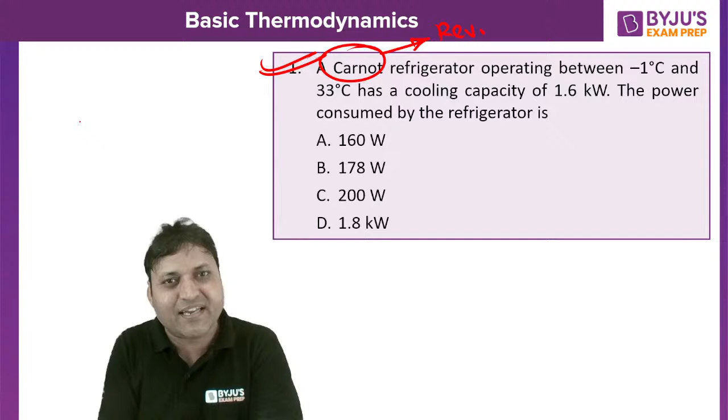There is a Carnot refrigerator. What is Carnot refrigerator? It is the reversible refrigerator operating between -1 degree Celsius and 33 degrees Celsius. T2 is equal to -1 degree Celsius. There is a refrigerator, work input is W, and this is the higher temperature, 33 degrees Celsius. It has a cooling capacity, let me call it Q2, then this is Q1. What is cooling capacity? That is the refrigeration effect of 1.6 kilowatt. Q2 is 1.6 kilowatt. The power consumed by the refrigerator is to be calculated. Can you let me know what is the power consumed by the refrigerator? So W is to be calculated.

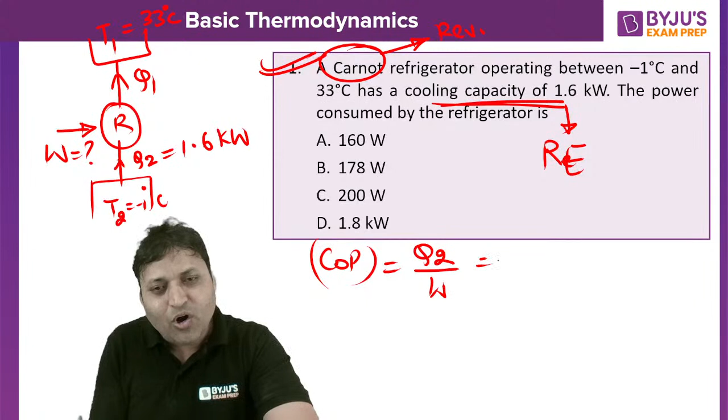Because it is a reversible refrigerator, COP is desired effect upon work input. So that is Q2 by W, and because it is a reversible refrigerator, we can write it in terms of temperatures T1 and T2.

We can equate this. This is the expression for COP for reversible as well as irreversible cycle, but this expression is completely applicable to reversible cycle: T2 upon T1 minus T2. What is the answer? Pawan is saying B, Sai is saying C. What is the correct one?

Q2 is 1.6, and the question is to find out the power consumed. So we can say W is equal to Q2 into T1 minus T2 upon T2. Put the value, you will get the answer. Q2 is 1.6 kilowatt, and T1 minus T2 is equal to 34. Isn't it 34?

34. The difference is because the T2 temperature is negative, -1 degree Celsius. So 33 minus -1 is 34, divided by T2. T2 must be in Kelvin.

The temperature has to be absolute temperature. As long as we are talking about the temperature difference, you can either calculate in degree Celsius or Kelvin, it will give you the same result. But when we are writing T2, then it must be 273 minus 1. That is where people commit mistake. So whenever writing the temperature difference, it is 34, whether you find the difference in Kelvin or Celsius.

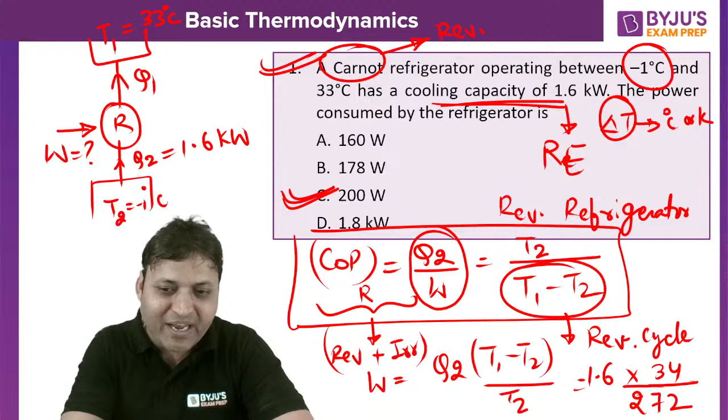The next question, number 2, on your screen. Very simple, very easy, but these types of questions are also important from your competitive examination point of view.

On a TS diagram, the slope of constant volume line - if I draw a TS diagram, this is entropy on x-axis, temperature on y-axis. This is how the diagrams will be drawn, like this.

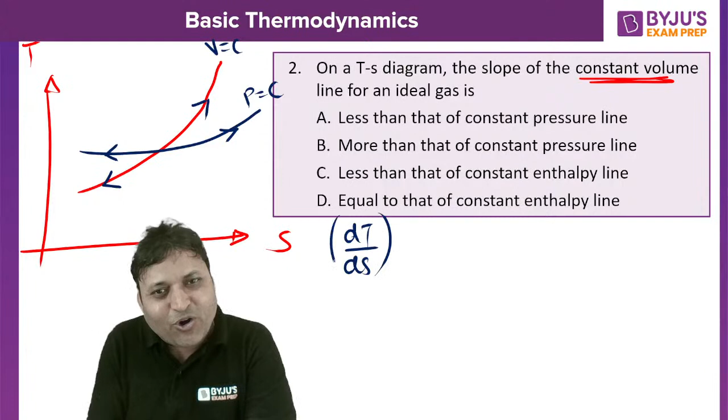So constant volume will be having more slope, constant pressure will be having less slope. So dT by dS for constant volume is T by Cv, and dT by dS for constant pressure is T by Cp. Because Cp is greater than Cv, or Cp by Cv is equal to gamma, which is greater than 1, we can say slope of constant volume is equal to gamma times slope of constant pressure process. So gamma is greater than 1.

So constant volume lines will have more slope than constant pressure line. Anjali, it is not A, it is option B. Constant volume will have more slope compared to constant pressure. This is how we can write the slope on TS diagram.

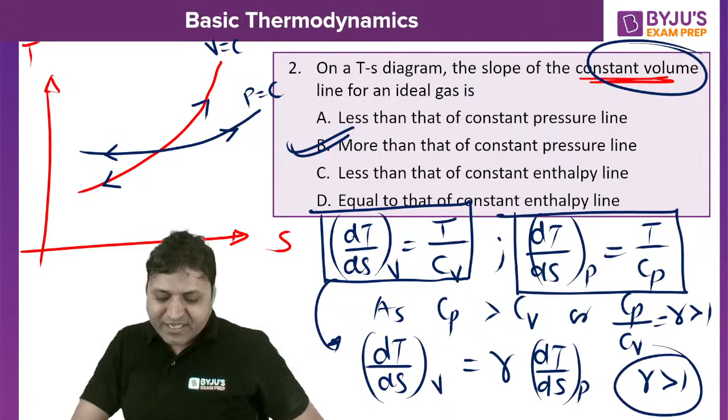Can you just let me know, isothermal and adiabatic, which will be having more slope? Is it isothermal or adiabatic process on PV curve? On PV curve, if I ask you, which is having more slope, isothermal or adiabatic?

On the PV curve, dp by dv for isothermal is equal to minus p by v, and dp by dv for adiabatic process, slope is negative, equal to gamma times minus p by v. So the adiabatic process will have more slope than the isothermal process on the PV curve.

But on the TS diagram, the slope of the constant volume process will be more than the constant pressure process. Let us move to the next one.

How to draw isothermal and adiabatic process on the PV curve? Let me show you, they will be like this.

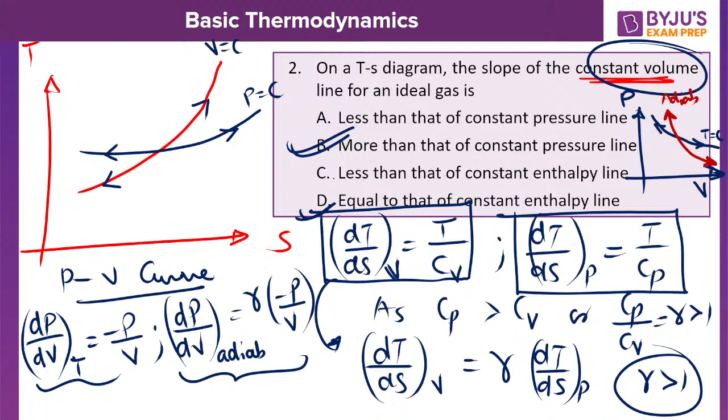This is adiabatic, and the other one is isothermal, on the PV curve. So you must know the relation between the slope of these curves on the PV diagram as well as the TS diagram.

The next one. Yes, Rowan, very nice. Please try the next one then.

Atmospheric air whose specific gas constant is 287 joule per kg Kelvin, gamma is 1.4. At 1 bar, pressure P1 is 1 bar and temperature T1 is 25 degrees Celsius, is compressed adiabatically to 2 bar. P2 is equal to 2 bar and temperature T2 is 105 degrees Celsius. Which one of the following statements is correct? Is the process possible or impossible, and if it is possible, will it be reversible or irreversible?

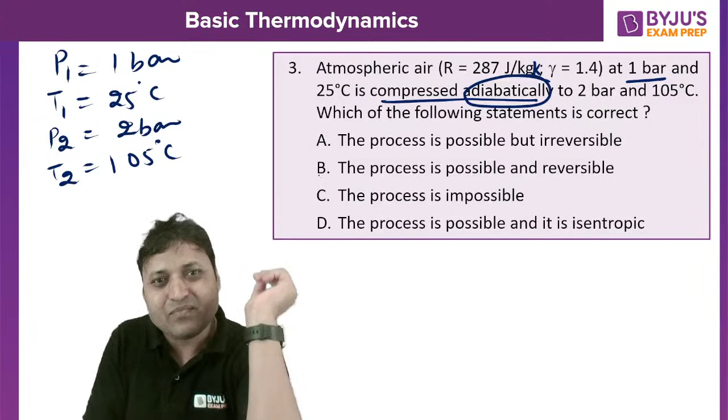Don't you think that option B and option D are the same?

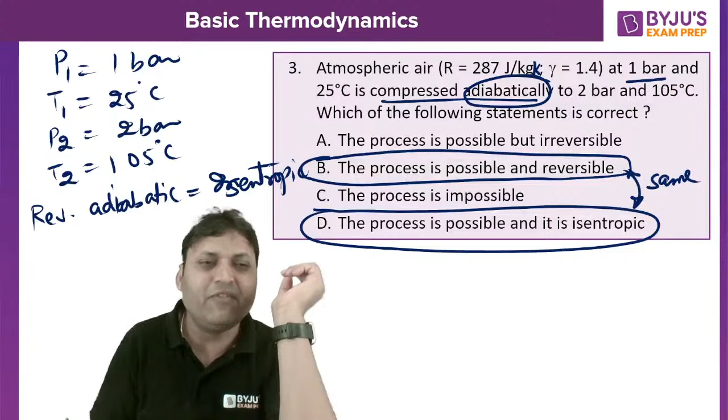When the process is possible and reversible, reversible adiabatic process is always isentropic. But is it reversible adiabatic or irreversible adiabatic? It is only adiabatic given, meaning Q is equal to 0. Will it be reversible adiabatic or irreversible adiabatic? I am waiting for your response.

So from the Tds equation, TdS is equal to dH minus VdP. Do you remember this expression? Or we can say ds is equal to dH by T minus V by T into dP, and PV is equal to RT, where V is the specific volume. Since it can be treated as an ideal gas, dH can be written as Cp dT. So ds is equal to Cp dT by T minus V by T, which is R by P, into dP.

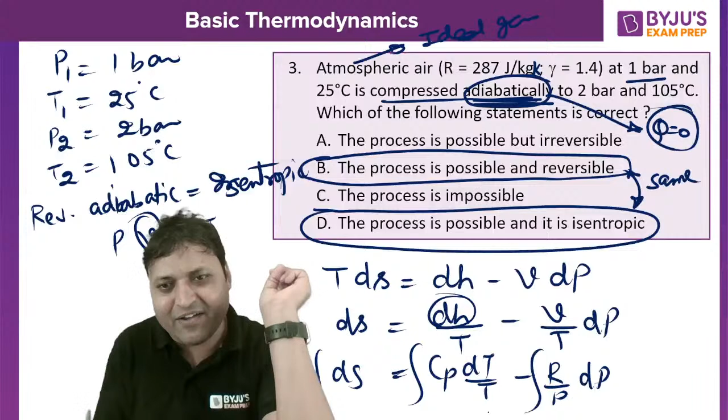And if we integrate, then we will get delta S is equal to Cp ln of T2 by T1 minus R ln of P2 by P1. That will give you the change in entropy of the system.

What is Cp? It is atmospheric air, gamma is given, R is given. R is 287, gamma is 1.4, so Cp will be equal to 1005. Don't forget to convert the temperatures into Kelvin by adding 273. So delta S is equal to 1005 ln of (105 plus 273) upon (25 plus 273) minus R, 287, ln of final pressure upon initial pressure, that is 2 upon 1.

What is the value of delta S for the system? What is the change in entropy for the system? Are you getting 40 joule per kg Kelvin change in specific entropy?

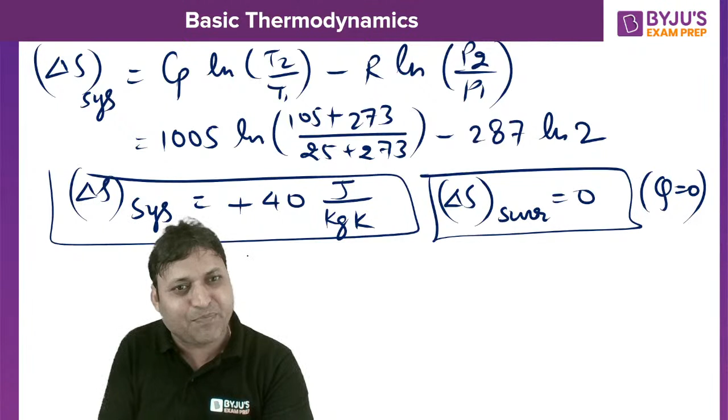And what is the change in entropy for the surroundings? That is equal to 0 because there is no heat loss to the surroundings, since Q is equal to 0. So the entropy change for the surrounding is equal to 0, and entropy change for the system is plus 40. So the change in entropy for the universe will be the change in entropy for the system plus the change in entropy for the surrounding, and that will decide whether the process is reversible or irreversible.

If the change in entropy for the universe is greater than 0, then the process is irreversible. If the change in entropy is equal to 0, then it is a reversible process, and if it is less than 0, then it is impossible. The process is not possible for which the change in entropy for the universe is less than 0. So entropy of the universe never decreases, this is called the principle of increase of entropy of the universe.

That is called the principle of increase in entropy of the universe. Because it is greater than 0, the process is irreversible and possible. Option A is the right answer.

Option A is the correct answer, isn't it? Don't think that because it is adiabatic, it is isentropic. Adiabatic is not isentropic. Only reversible adiabatic is isentropic. Reversible adiabatic is isentropic - don't think that just because an adiabatic process is given, we can call it isentropic.

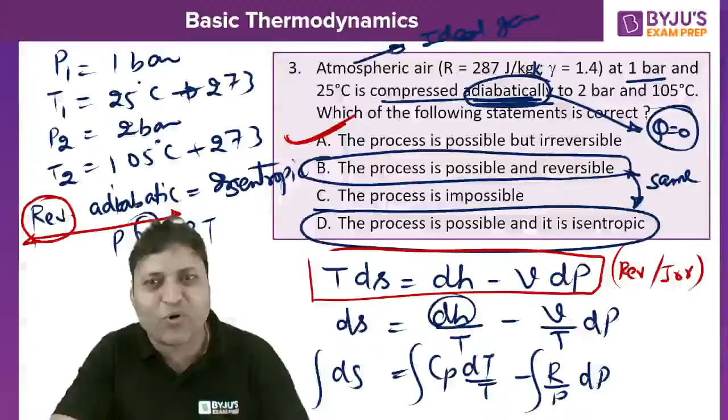I hope it is clear to everyone. This expression is valid for reversible as well as irreversible process. We do not know whether the process is reversible or irreversible. We can find out the change in entropy for the system, change in entropy for the surrounding, and then calculate the change in entropy for the universe, and decide whether the process will be possible or impossible.

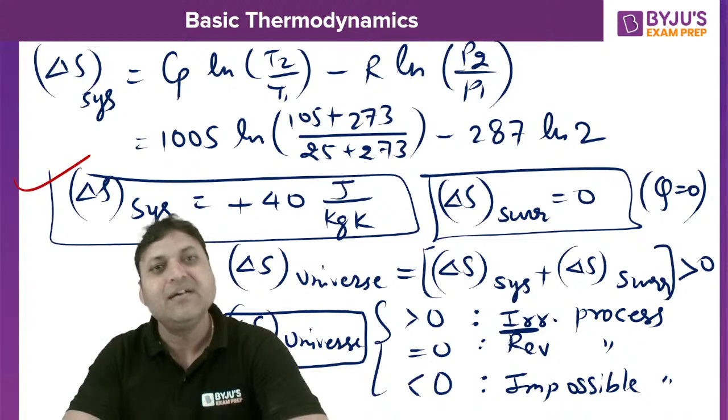Next one, question number 4. Is this clear to everyone? Please make some noise.

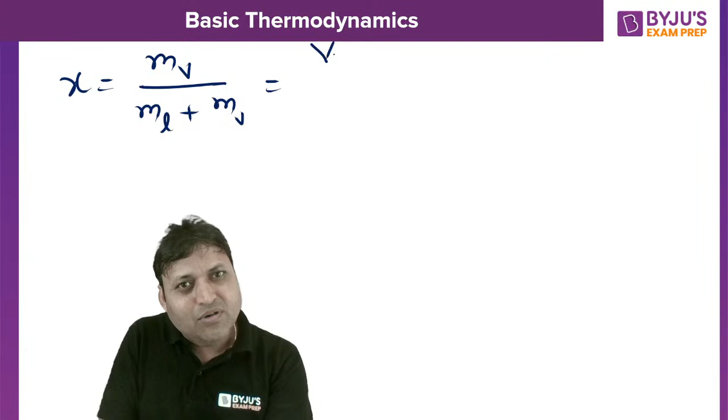Can we say mass of vapor is equal to volume of vapor upon Vg? And what is mass of liquid? That is volume of liquid upon VL, plus mass of vapor which is volume of vapor upon Vv, or specific volume of vapor.

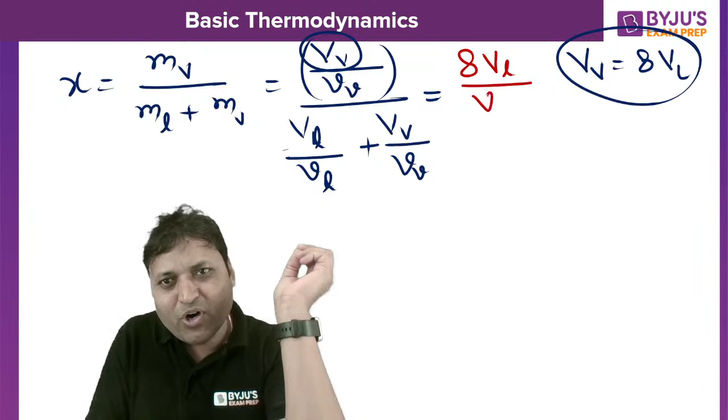Now volume of vapor is 8 times the volume of liquid, that is also given. So if we put volume of vapor as 8 times volume of liquid, we get 8VL upon VV upon VL upon VL plus 8VL upon VV. If you take VL common, it gets cancelled out. So the dryness fraction is given by 8 by VV, upon 1 by VL plus 8 by VV.

These are specific volume of vapor, and this is called specific volume of liquid - specific volume of vapor and specific volume of liquid. Can you let me know the answer? Can you solve it? The specific volumes are already given, put the values - this is for liquid and this is for vapor. What is the answer?

If you put the values: 8 divided by 1.6729, upon 1 upon 0.001044 plus 8 by 1.6729. That will give you the answer.

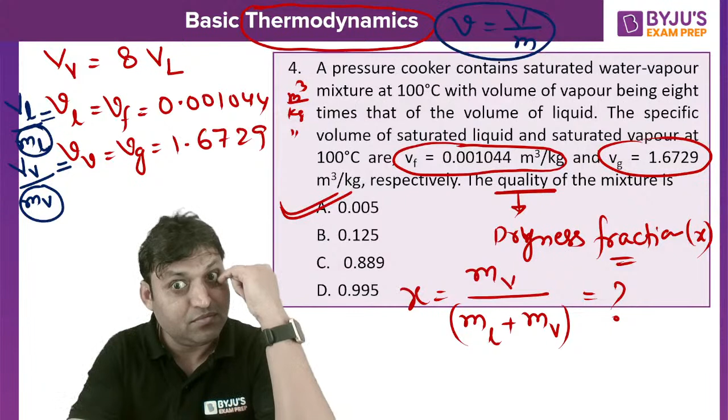Anurag, are you getting option D? The D you are getting - isn't it option A? Yes, Manas. Good, good, good.

Is this clear to everyone? The dryness fraction is the ratio of mass of vapor to the total mass of the mixture, that is sum of mass of liquid and mass of vapor. And we can write this expression in terms of specific volume of liquid and specific volume of vapor, because specific volume is volume per unit mass.

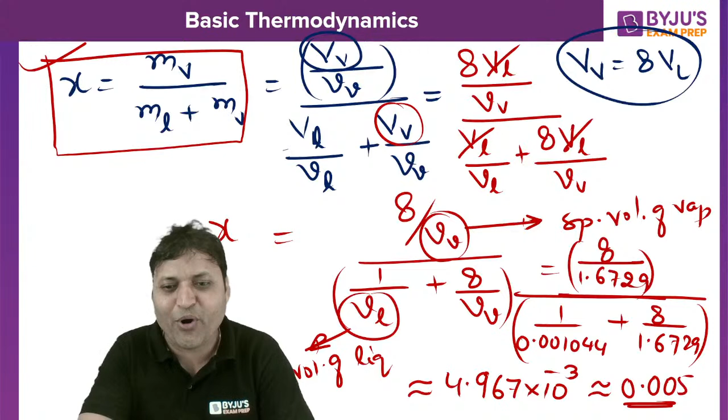Right? Time. Are you getting 4.96? 0.005. Option A is the right answer.

Next one. Next question.

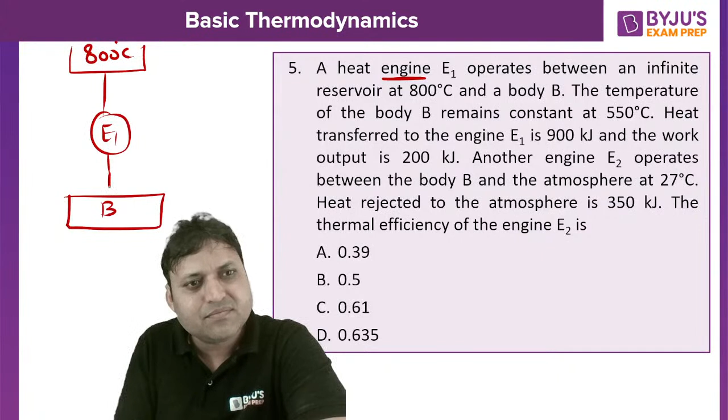There is a heat engine, a work producing cyclic device. E1 operates between an infinite reservoir at 800 degrees Celsius and a body B. The temperature of body B remains constant at 550 degrees Celsius.

Read the question and draw the diagram. Heat transfer to the engine E1 is 900 kilojoule, so Q1 is equal to 900 kilojoule, and the work output W1 is equal to 200 kilojoule.

Another engine E2 operates between the body B and the atmosphere at 27 degrees Celsius. They are not reversible engines - it is not mentioned that they are reversible. Heat engine.

Now, because the temperature of body B remains constant at 550 degrees Celsius, what does that mean? Whatever heat is added to body B is equal to the heat removed from body B. Q2 will be the same, because the temperature TB is equal to constant.

Heat rejected to the atmosphere is 350 kilojoule. The thermal efficiency of engine 2 is - what is the value? What is the thermal efficiency of engine 2?

This is how the diagram will be drawn. What is the thermal efficiency of engine 2? The work output by engine 2 upon heat input to engine 2, that will give you the answer - W2 by Q2.

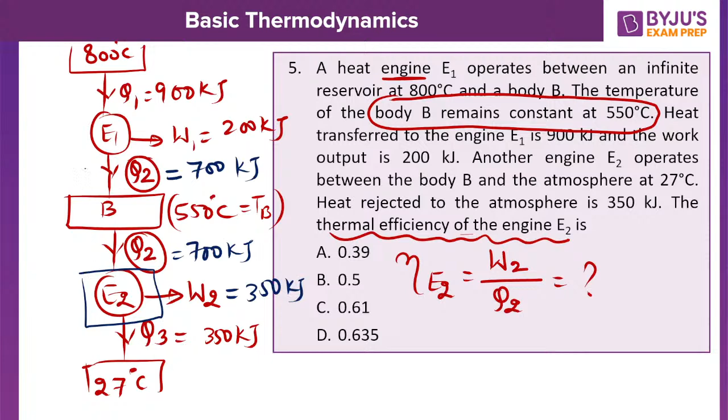This follows from the first law of thermodynamics applied to cyclic devices: net heat transfer is equal to net work transfer for a thermodynamic cycle. So W2 will be equal to 350 and Q2 will be equal to 700, giving 0.5.

Right? Fifth question, answer to the fifth question is B. Yes, Anurag. Well done.

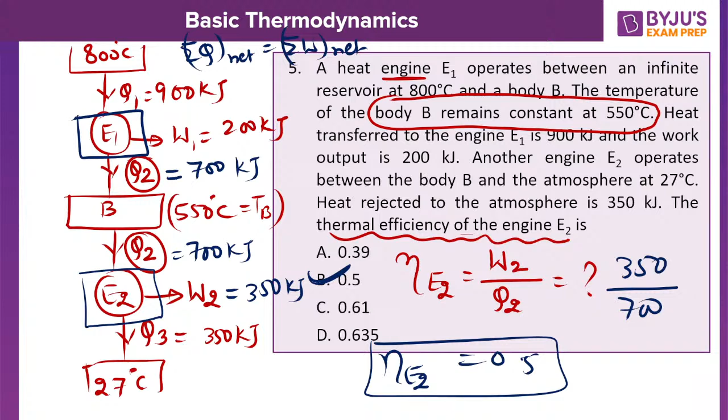Shall we proceed further to the next one? Question number 6 on your screen. Already, I want everyone to solve it.

An engine, again there is an engine - a work producing cyclic device, clockwise cycle. It reversibly receives 1200 joule of heat at 900 Kelvin. The Q1 is 1200.

After rejecting heat to the ambient at 300 Kelvin, it develops 600 joule of work. The irreversibility is equal to - is it option D?

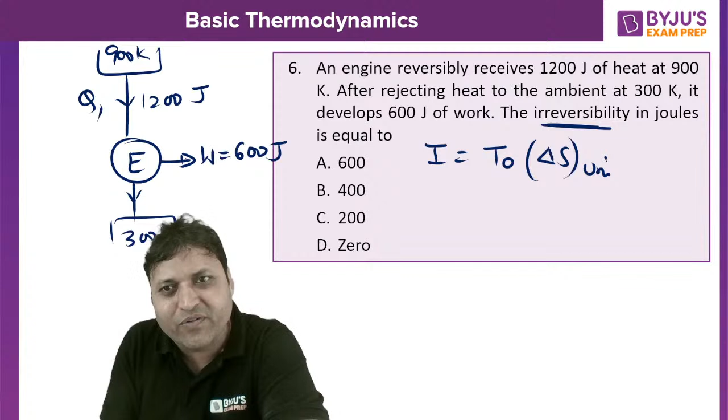Irreversibility. Can you find out the irreversibility? What is irreversibility? Irreversibility is T naught into delta S for the universe, or entropy generation - T naught into delta S of universe.

Can you find out the irreversibility? So we can treat this system as an isolated system. The system is isolated - only work is produced by the system, so the work does not carry entropy. That is why it is an isolated system.

So how to calculate the change in entropy? For the change in entropy, we can say irreversibility is T naught into delta S1 plus delta S2 - that is reservoir 1 and reservoir 2. There is no change in entropy for the working fluid. T naught is 300 Kelvin, the ambient temperature.

There is a decrease in entropy for reservoir 1 source because heat is rejected, so we can say minus Q1 by T1, plus there is heat added to reservoir 2, so plus Q2 by T2, where T2 is equal to T naught. That will give you the answer, irreversibility.

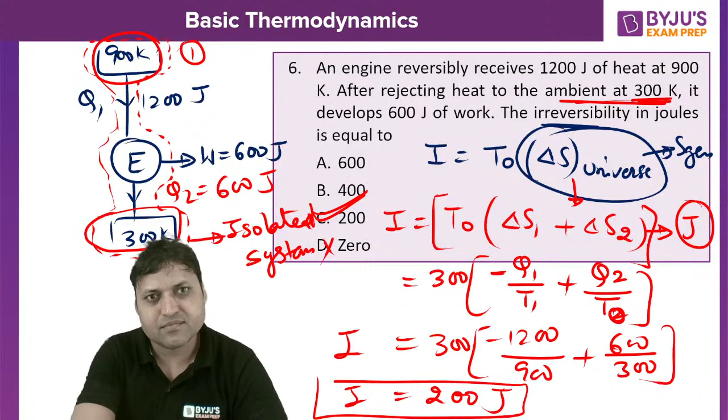Then there is a common data question for question number 7 and 8.

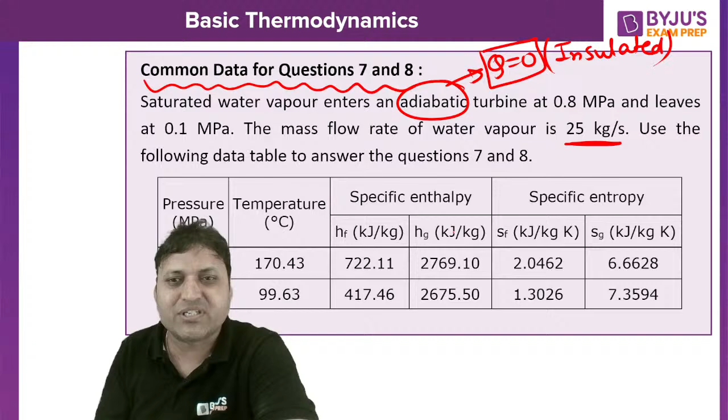Use the following data table to answer question 7 and question 8. Shall I show you question number 7? Quality of steam at the exit of the turbine after isentropic expansion is what? What is the value of X when expansion is isentropic?

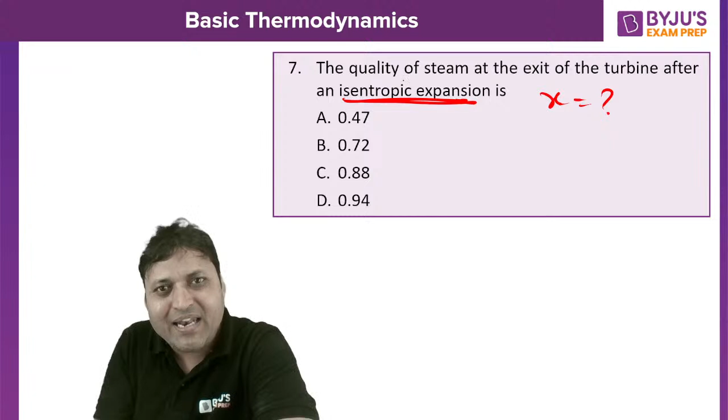If I draw the TS diagram, it is saturated water vapor entering into the turbine, so the curve will be like this. This is point 1, and it is like this, isentropic, to point 2. What is the value of X2? These are constant pressure lines. This is 0.8 megapascal and this is 0.1 megapascal.

Can you find out the dryness fraction using this table? Can you find out the quality of steam? Can you solve it?

S1 is equal to S2 because the process is isentropic. What is S1? S1 will be equal to Sg, so S1 is Sg in kilojoule per kg Kelvin.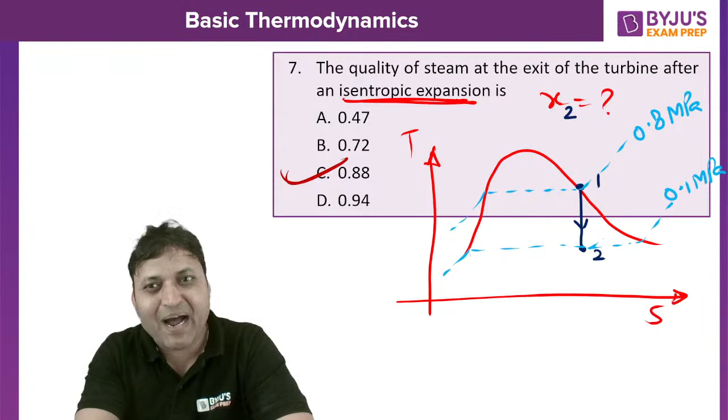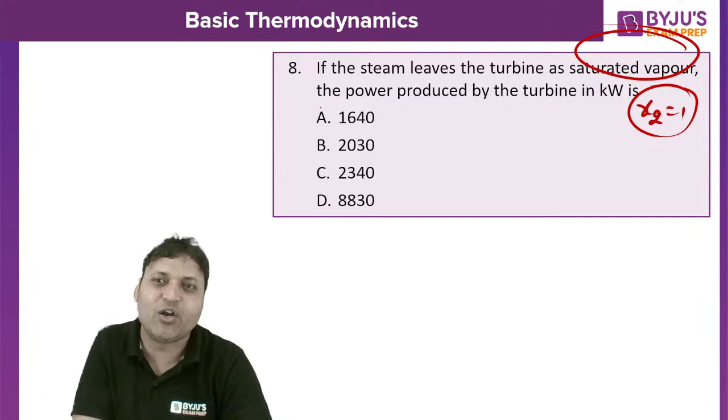That is the first part, and the second part of the question is: if the steam leaves the turbine as saturated vapor, it means x2 is equal to 1. What will be the power produced by the turbine in kilowatt? X1 is also 1, x2 is also equal to 1. Then what will be the power produced? Can you find out the power produced by the turbine?

Question number 8. The power produced will be equal to, because there is no heat transfer, from the steady flow energy equation we can say Q is equal to W plus delta H. There is no change in potential energy, no change in kinetic energy, so Q is equal to 0. So we can say W is equal to H1 minus H2. That is how the power produced can be calculated.

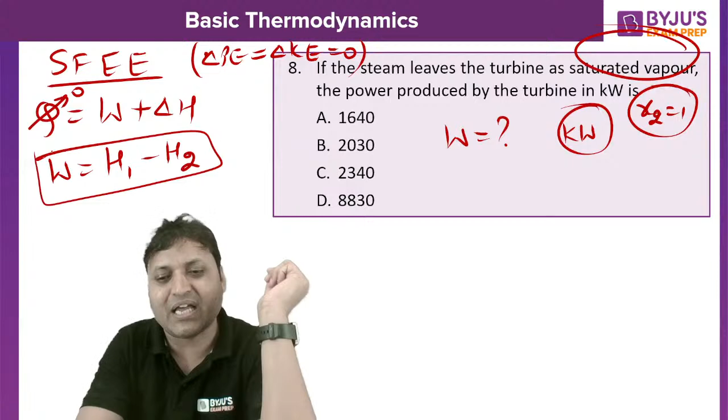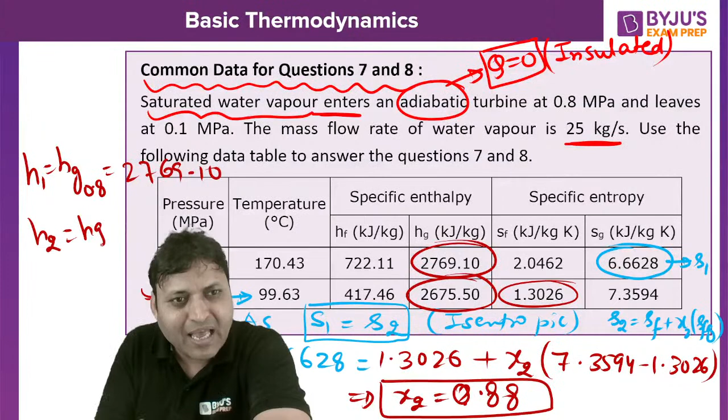What is H1? H1 will be equal to Hg at 0.8 megapascal, that is 2769.10. What is H2? Because it is leaving the turbine as saturated vapor only, H2 will be equal to Hg at 0.1, that is 2675.5. So subtraction of these two will give the answer, in kilojoule per kg.

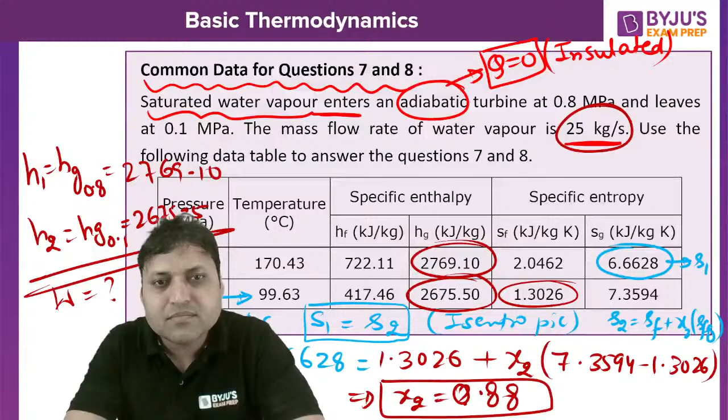We need to find out in mass flow rate is also given, so we need to find the answer in kilowatt. W dot is equal to mass flow rate into H1 minus H2, in kilowatt. We need to multiply with the mass flow rate as well. So it is 2769.1 minus 2675.5, that will give you the answer. What is the answer? For the second part, are you getting option C again?

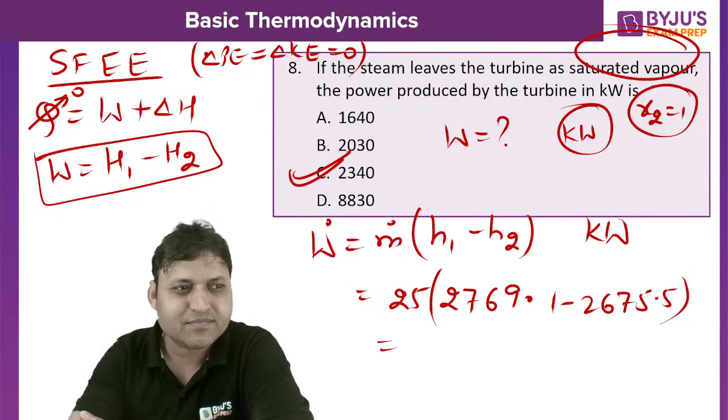7th and 8th both will have option C as the correct answer. Question number 9, next one. Everyone please let me know the answer through the comment section.

A heat pump which operates in a cycle extracts heat energy Q2 from the cold reservoir, and supplies the same amount of energy Q2 to the hot reservoir. This is T1, this is T2. So we can say work is equal to 0. From the first law of thermodynamics, whatever energy is entering is equal to energy leaving, so work will be equal to 0. Which one of the following statements holds for this process?

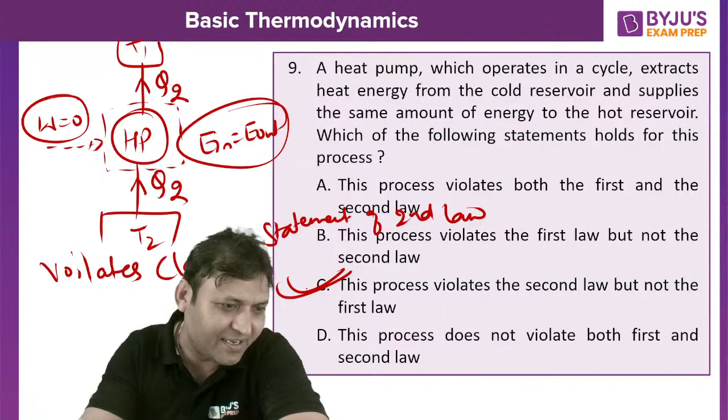There is helium in one part. Specific heat, gas constant is given, Cp and Cv are also given, while the remaining half is empty. There is vacuum in the remaining half.

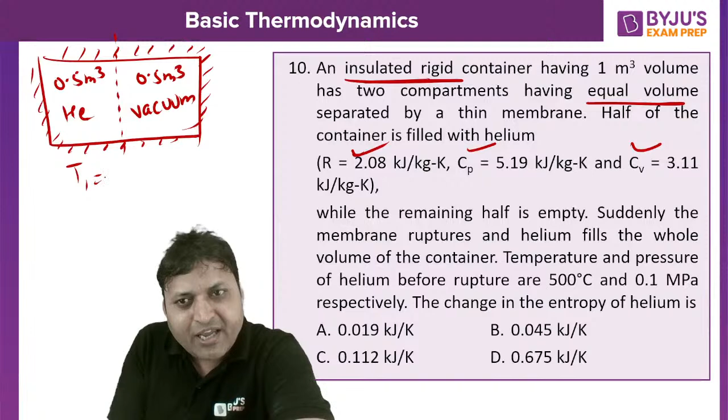Suddenly the membrane ruptures and helium fills the whole volume of the container. Temperature and pressure of helium before rupture are T1 equal to 500 degrees Celsius and P1 equal to 0.1 megapascal. The change in entropy of the helium is to be found, so it is free expansion.

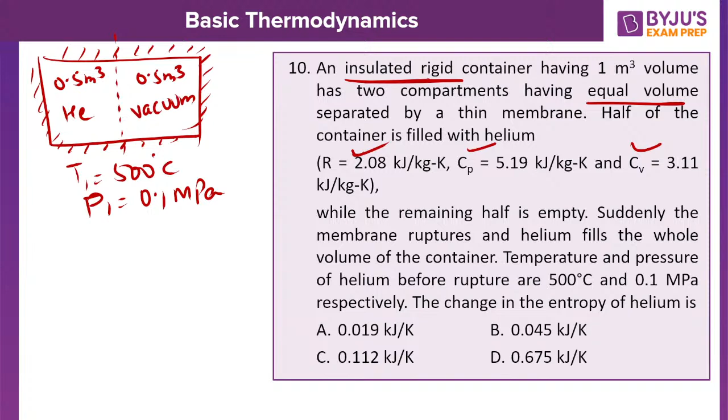Isn't it free expansion? It is a case of free expansion. What is the answer? Question number 10. Have you solved it? So it is free expansion.

And for free expansion, U1 is equal to U2 by the first law. When it is free expansion, Q is equal to W plus delta U. Q is equal to 0 because it's insulated. W is equal to 0 because it's rigid. So delta U is equal to 0, meaning U1 is equal to U2.

And if it is an ideal gas, so T1 is equal to T2, because for an ideal gas, U is a function of temperature only.

So if we write TdS equal to dU plus PdV, that will give you the value of change in entropy. Since dU becomes 0, we can say dS is equal to P by T into dV.

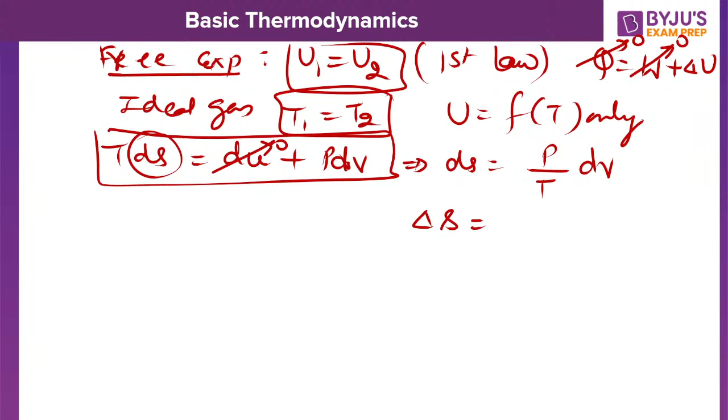Or we can say change in entropy is equal to... the question asks to find the change in entropy in kilojoule per Kelvin. We need to have the mass flow rate also. Delta S is equal to...

PV is equal to MRT, so we can say P by T is equal to MR by V. The unit will be joule per Kelvin.

This is capital S. Or we can say delta S for the system will be equal to M into R into ln of final volume by initial volume. And M into R can be written as P1V1 upon T1, into ln of final volume by initial volume. That is the change in entropy for the system.

It is free expansion, which is irreversible. Free expansion is irreversible. So this will give you the answer. Can you put the values and solve it? P1V1 upon T1 into ln of Vf by V initial.

So change in entropy will be equal to 0.1 into 10 to the power 3, because I want it in kilojoule. P1 into V1, the initial volume 0.5, upon T1. T1 is 500 degrees Celsius, so it is 500 plus 273, into ln of the final volume, which is 1, upon 0.5. That will give you the answer, the change in entropy of helium.

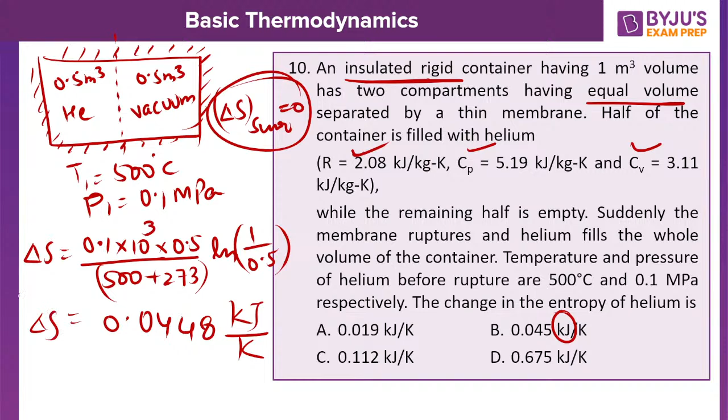Free expansion is irreversible. What is the answer you are getting? Question number 10, are you getting option B, 0.0448 kilojoule per Kelvin? The unit conversion is very, very important.

Where to multiply with mass flow rate? If I talk about specific entropy, that is joule per kg Kelvin. But if I write total entropy, that is joule per Kelvin, which is mass into specific entropy.

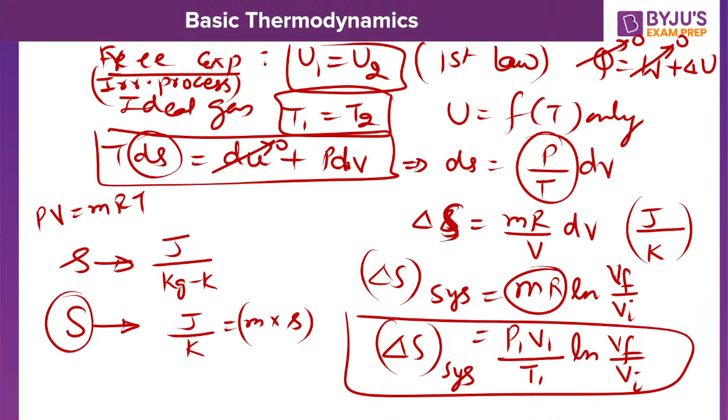The next one. The next question.

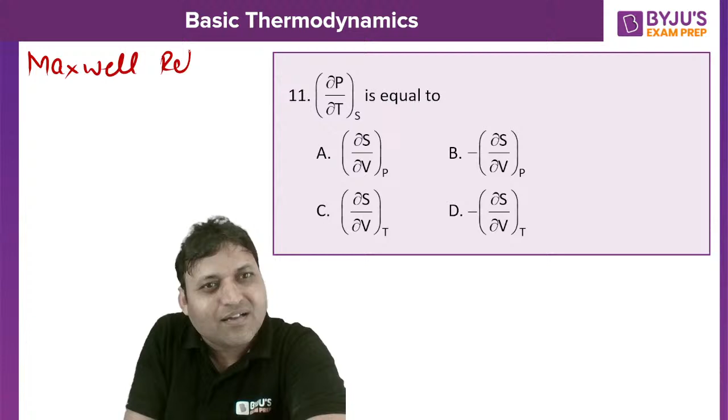Do you remember Maxwell relations? Do you remember the Maxwell relation 4 equations? Theoretical questions can be framed from that portion.

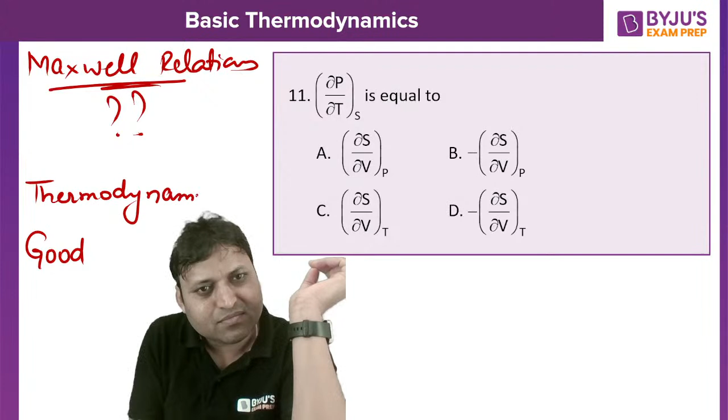What is the answer to question number 11? Do you know? You can memorize the Maxwell relationship by using this short trick, or by using the thermodynamic square. Are you having an idea about the thermodynamic square? Good.

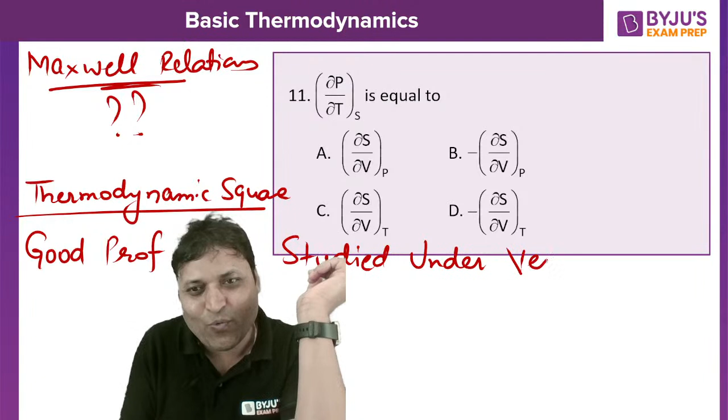Forgot the shortcut to remember. Generally people make a shortcut to remember, but yes, there is a possibility you might forget the shortcut even. Good professors have studied under very fine teachers.

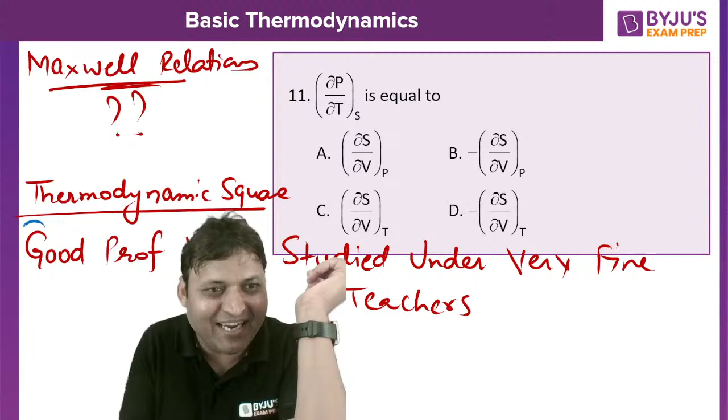Good professors have studied under very fine teachers. If you remember this statement, then you can develop the Maxwell relationship. Note: if S and P are coming together, put a negative sign.

So let me check your memory. What is the correct answer to question number 11? If S and P are coming together, put negative sign.

Now draw the thermodynamic square. This is the thermodynamic square, let us say. Start from here: Good professors have studied under very fine teachers.

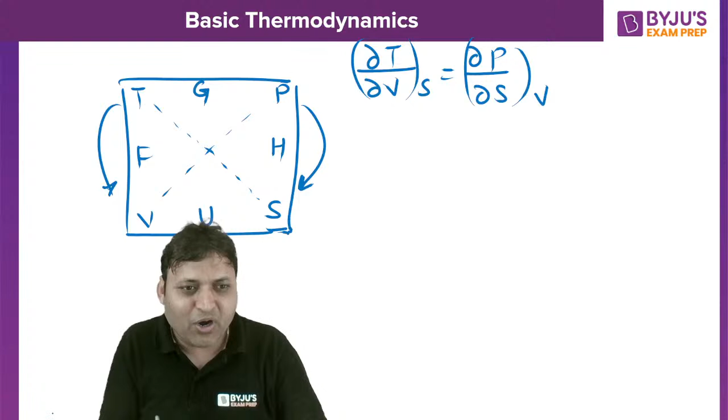First write this: del T by del V at constant entropy is equal to del P by del S at constant volume. Because there is S and P coming together, there is a negative sign. Then write this.

This is one equation. Then we can say del V by del T at constant pressure is equal to del S by del P at constant temperature. Again there is S and P coming together, so there is a negative sign here also.

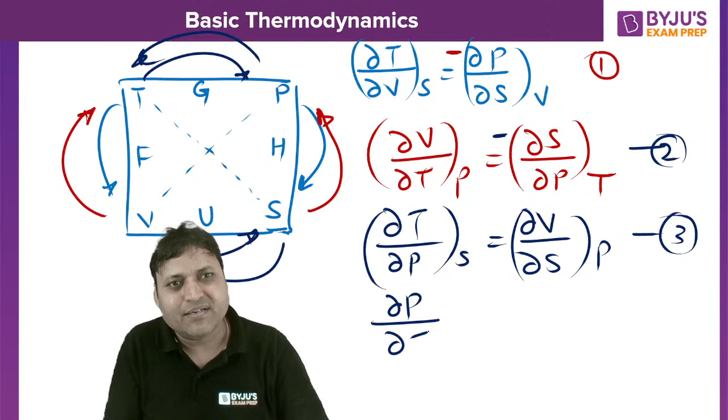This is 2. Then you can write del T by del P at constant entropy is equal to del V by del S at constant pressure. This is 3. And the fourth one: del P by del T at constant volume is equal to del S by del V at constant temperature. This is 4.

So which is it? It is del P by del T at constant entropy, or del T by del P at constant entropy? It is from this - del P by del T.

So from here what we can write: del P by del T at constant entropy is equal to del S by del V at constant pressure, isn't it? Isn't it option A?

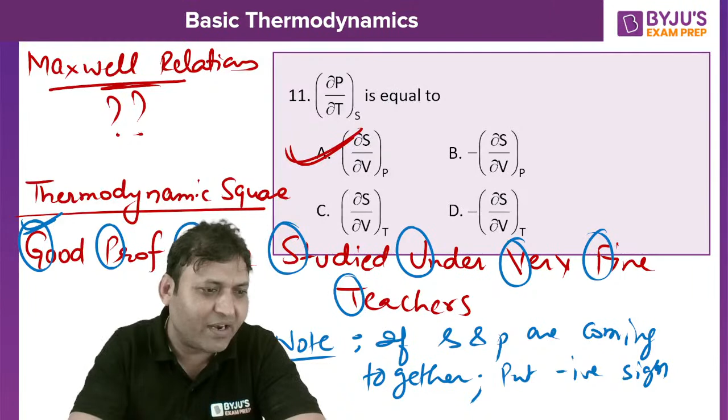Option A is the correct one. Are you getting it? So that is the shortcut to memorize the Maxwell equations. There is a high possibility that any theoretical question can be framed from the Maxwell equation.

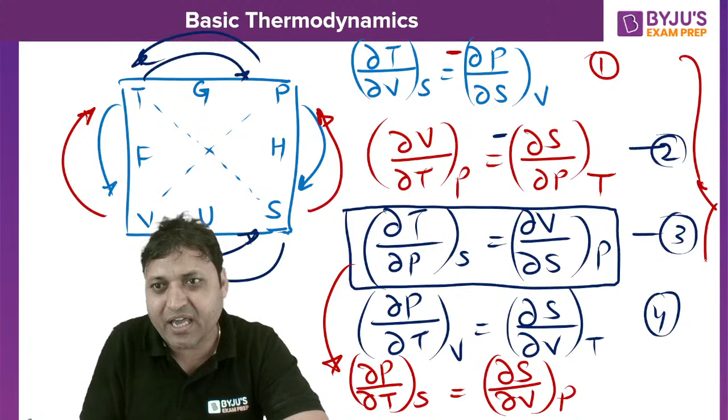The next question, number 12. Call the next one.

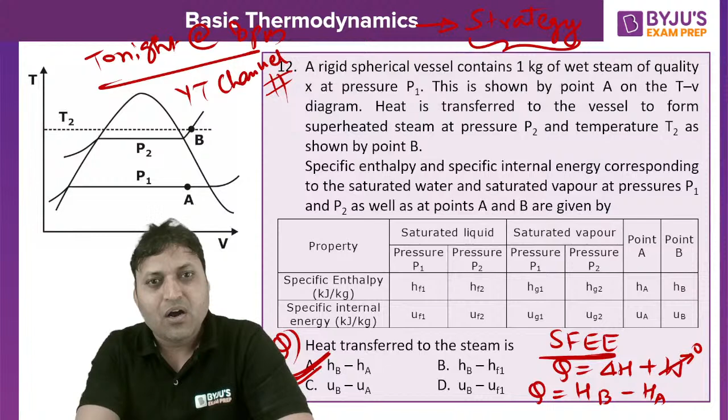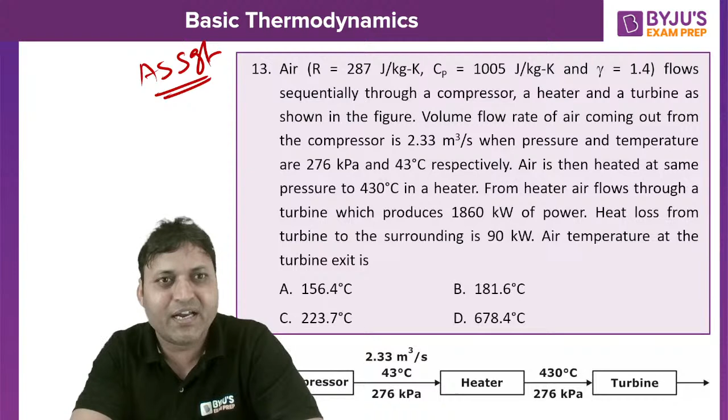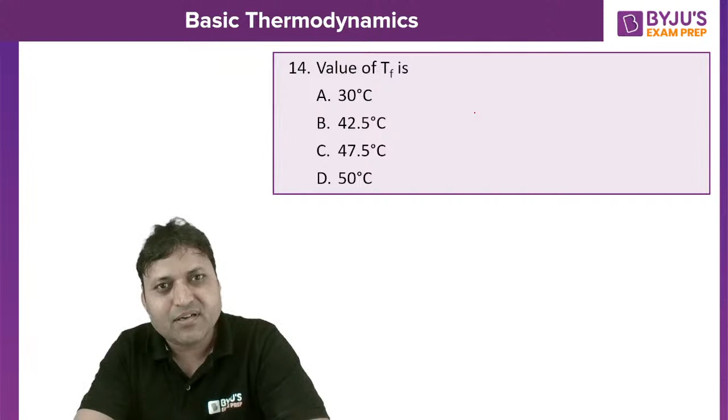This is a beautiful linked answer question. So this is another assignment question, question number 14, for the same linked question, and question number 15.